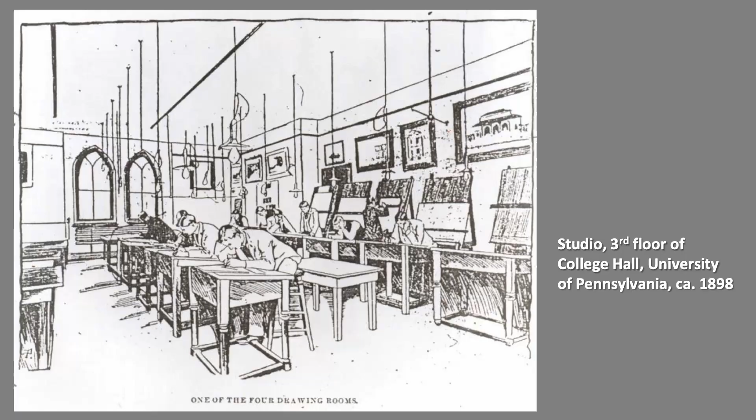Before going into talking more closely about the objects related to Kahn and Komendant, I want to talk a little bit about what I do. I mentioned the idea of architectural imagination and my collection being part of a school of design - the idea that you bring drawings and models as examples into architectural education, that you bring it literally into the building and hang it on the walls of the school. This is something you can learn from.

It's probably a natural and very direct way for one architect to learn from another one. Of course, visiting the buildings and landscapes are also quite important.

This is the University of Pennsylvania in the 1890s. Here's Penn in about the 1920s when Louis Kahn was a student there. This is in the library, and you see the drawings here. In fact, this drawing and the one in the middle are still part of the collection that I'm responsible for.

It's really exciting to see, while our collection was founded in 1978 as the Architectural Archives, we have collections that go back maybe more than 100 years. Of course, this follows the tradition of the École des Beaux-Arts in Paris, among others. So there's lots to learn by looking closely at drawings.

Of course, everybody does things digitally now. When I talk to students, it's always quite exciting for them to see an original drawing - the questions of scale, the questions of technique, how you try different techniques as you're trying to solve complicated problems, how you change the way you're drawing to learn new things, to approach the problem in a different way.

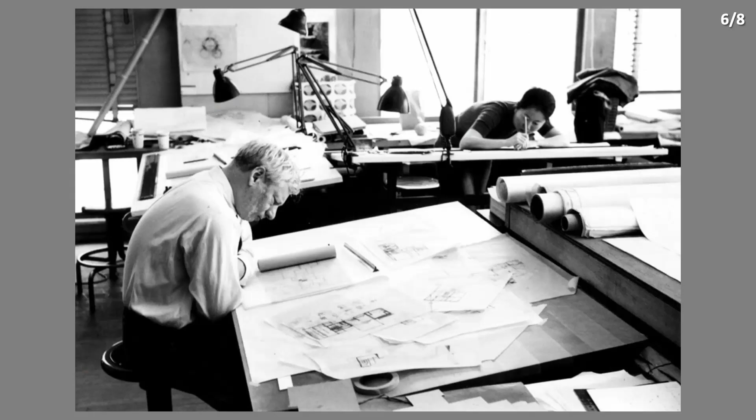We see him working on his own at his desk, a collection of drawings, different things spread out. He's pausing, thinking, scratching his head, what next? That gets me really excited when you see an architect or landscape architect pausing and thinking about where to go next. So he's going to sit and think, he's waiting, maybe considering. That gives us pause too.

We can see other figures, other things in the office: the objects on the wall, the other desks, the arrangement of desks, the rolls of drawings. We see Marie Quo, one of his collaborators, in the office. His office had about 12 or 14 people besides Marie. This is right as he's starting work on the Salk Institute, which I'll talk about in a few moments.

So he knows he's got another idea. You see the charcoal or pencil to paper, the stepping back and pausing.

And then in the classroom, these are all places of learning, discovery, places that were useful to Kahn or essential to Kahn in his creative thought. While we're focusing on him just in this little conversation, it's actually much more expansive than that.

To address Kahn and Komendant as a collaboration is to talk more about this network of people that includes clients and the staff that worked for Kahn. It becomes interesting when you spend 25 years working with a collection - you understand there are decisions, there are preferences being expressed when Kahn brings certain staff to work on a project. Often those staff were his students - an environment of teaching at the University of Pennsylvania, where Kahn taught from 1957 to 74 when he died.

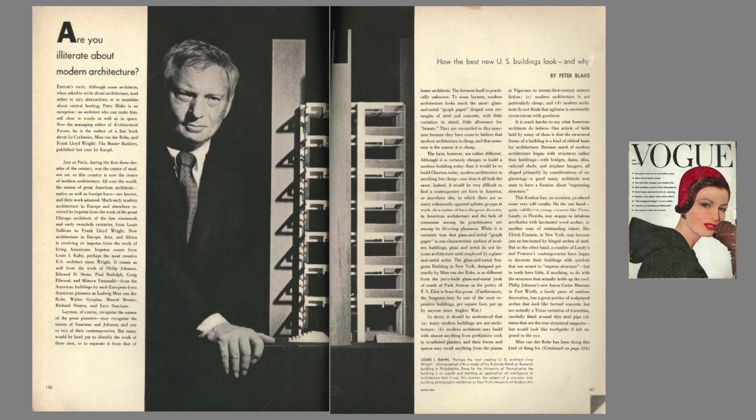We can see the completion of Richards in 1961 was followed up by an exhibition at the Museum of Modern Art in New York in 1962, just 6 months after the building was completed. This was a groundbreaking building that signaled a new departure in architecture. Something new was happening, and it was emanating out of Philadelphia.

It was happening other places too, and this is rethinking modernism - questioning certain of the canons of modernism, or the dogma or orthodoxy of modernism, whatever you like to call it, but making it more open to history, to individual experience, to other systems of thought and value. Ecological systems are very much on our mind today. You see that opening up in Philadelphia, amongst other things.

Sorry. And so, that's part of the background.

Within Kahn's own thinking, he was making a journey from an education as a Beaux-Arts trained architect, thinking about the classical world, but recognizing that classical architecture and the great Beaux-Arts tradition is a forward-looking, modern, problem-solving tradition. There was an evolutionary process going on in architecture that said you didn't have to leave the past behind, but you needed it to be more responsive to the contemporary world. His great teacher, Paul Cret, is part of that evolution.

But a key idea is what Kahn talked about of servant and served, right? That there are areas of a building where people are gathering to do things, working, living, learning, etc., and that there are places that support that, right? And this is hierarchy. This is places that support the work of the central character of the building.

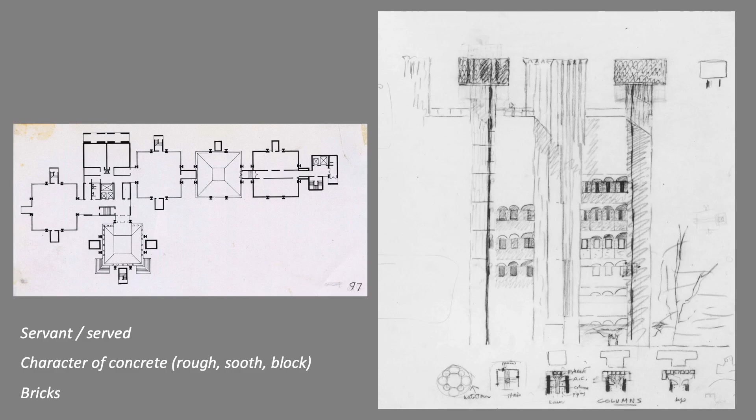The model upstairs, which we've lent for this exhibit, correlates to this scheme. And you can see how in the corners, there's dramatically cantilevered corners that open up the laboratory to natural light, right? Beautiful idea. It didn't really work to the satisfaction of the scientists, but I really don't have time to go into the full experience of the building tonight.

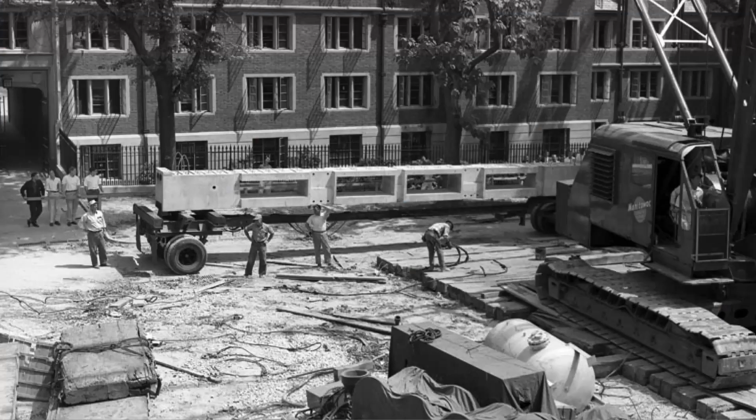So we have a wonderful set of photographs, and part of what I want to do is just slow us down and have us look at the photographs. I'm going to tell you what we're seeing, but as part of the joy of spending so much time with these materials is to start to understand that you can tell stories and that you can reveal what's on people's minds as you go through.

So this is the beginning of the construction using this precast concrete system that is part of the important innovation of August Komendant, right? You can see a large primary structural element that's been fabricated in New Jersey. It's been driven to Philadelphia. Actually, this piece came on a train and then was loaded onto a trailer and then brought onto site. It's a very tight site, very difficult site to approach and to work in.

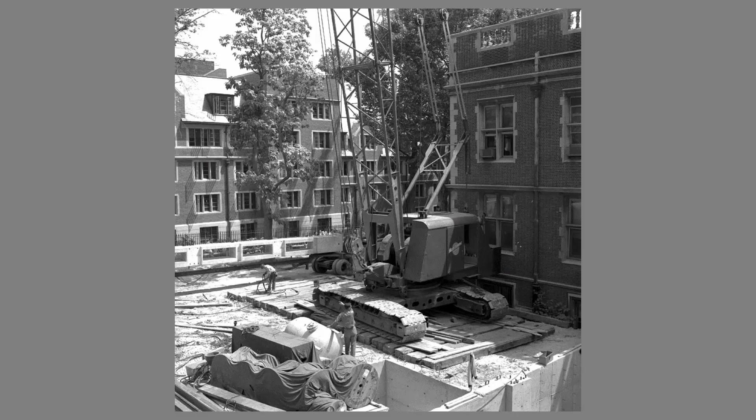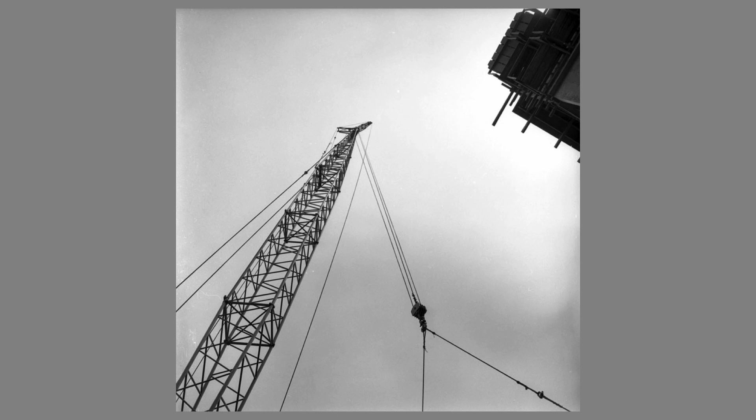And we can see the crane here. So we can see the presence of the crane and just how tightly constricted that space is, right? But the presence of the crane becomes a really important and inspiring part of this process that becomes an inspiration for Kahn. And we see the lifting of that beginning.

This is a favorite photograph, which I've cropped in a little bit, and you just see that 50, 60 ton concrete element. You can see the holes here that are part of the post-tensioning system that Komendant is really critically important in his legacy. But I want to point out the people that are standing at the periphery, right?

I mentioned the exhibition at the Museum of Modern Art. You guys also have to understand that literally people were gathering on the construction site to watch this building being built. So there was this anticipation of something new occurring. And there's evidence of it there. And we know that there were architects that traveled from all over the place to actually see this building under construction. Norman Foster and Richard Rogers among them, right?

And they took back to their work the experience of seeing this building being put together. The idea that how a building is made is a critical part of how one experiences the building. And that idea of building character, communicating the purpose of the building through the way the details come together, how the materials come together, this is really important in that regard.

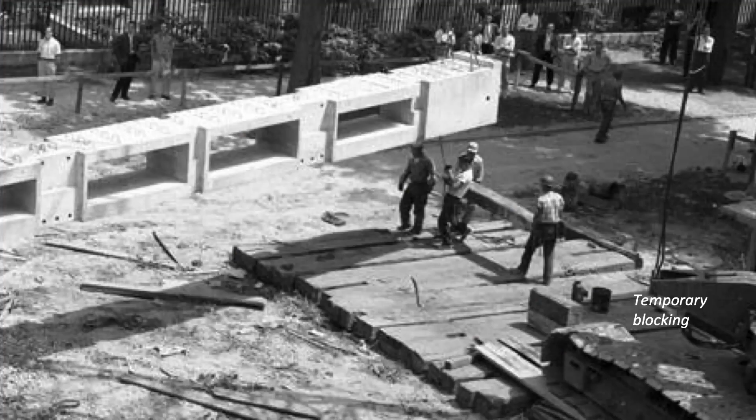I want to point out here are the two men lifting these big timbers up, and they're going to place the blocking because they're actually going to put this piece down. We're jumping ahead a little bit. We see them hoisting this first piece into place. It's actually the second piece, because when I go backwards you can see they dropped that first piece, then the second piece came up and they lifted that one into place. So we're reconstructing some of the sequence. It's like a ballet - there's choreography going on, it's not just Kahn and Komendant.

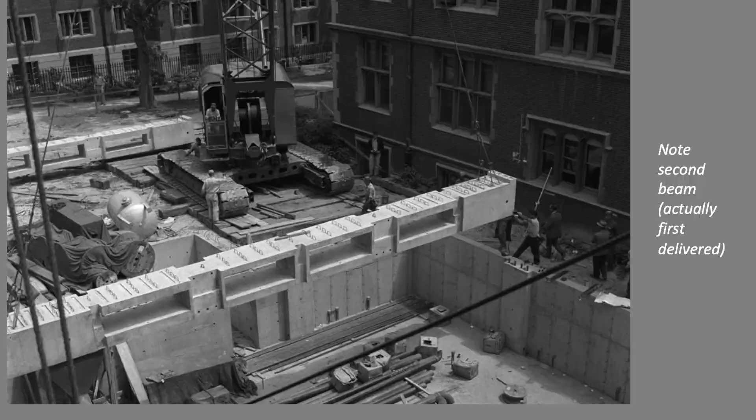You're starting to involve Atlantic Prestress Concrete Company, the builders J.S. Cornell and Company, but then also the collaborating structural engineers, Keast & Hood, who were the ones actually on site every day making sure the work was done with precision.

Here's that first piece dropping into place. You have the men holding the guide wires to pull the thing into place. You see some onlookers at the side, and there's more people gathered at the top there. This is a drama unfolding.

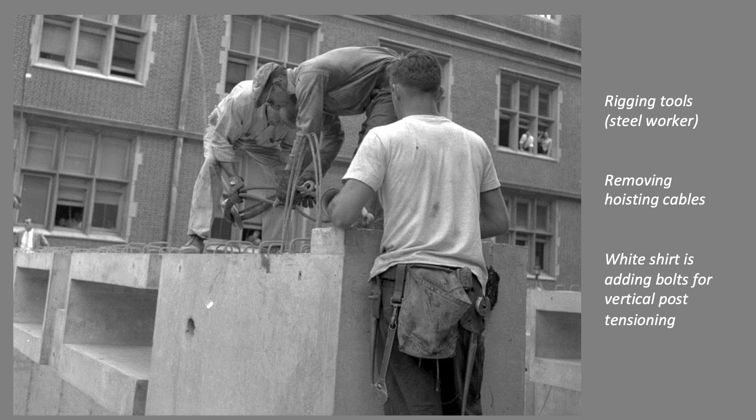Here they've put the first piece down. If you look at that tool, that's the tool of someone used to working with steel rather than concrete. Tom Leslie's book about Louis Kahn, Building Art, Building Science, is really great - one of the things he notes is J.S. Cornell was used to building steel buildings. They were not yet really familiar with this technology - that's how cutting edge it is. So you have steel workers trying to figure out how to deal with concrete, and they didn't necessarily have all the proper tools on site when they did this. It's interesting to find that narrative within these photos.

And the guys on the top are just removing the hoisting cables.

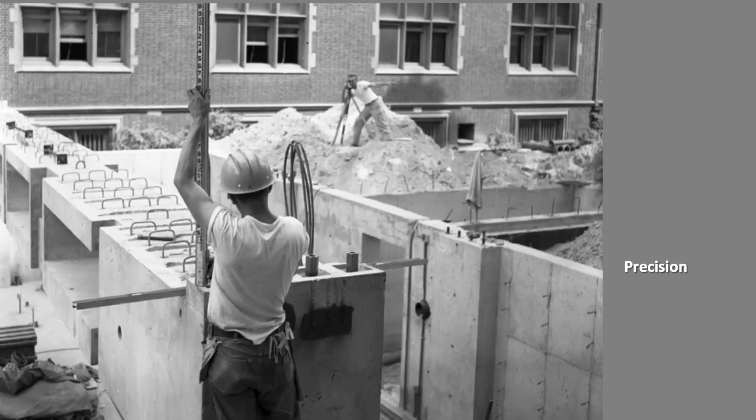I like this photo very much too. You see the surveyor making sure the levels are correct, and here he's holding the level - did they put this at the right level? In the end, the building is built to within a 1/16 of an inch tolerance. That's that much, right? So this level of precision is actually really quite remarkable.

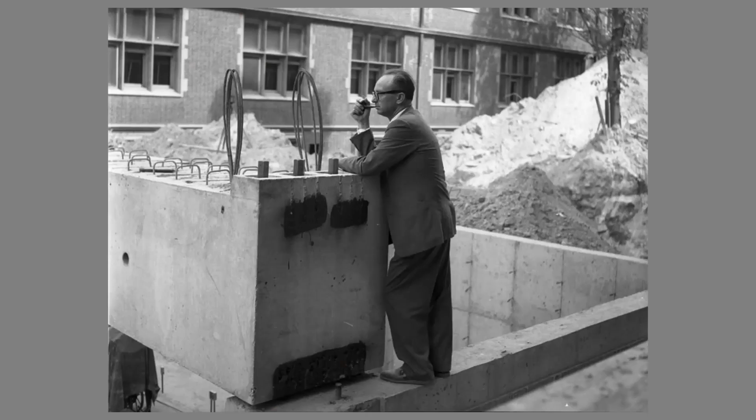And here's your first photograph of Komendant on the site. He's actually come to the site and he's part of this first group of assembly. This actually took about 5-6 months to assemble the 3 towers. I'll show you in a moment, you'll get a better sense of it.

There's actually 3 different kinds of concrete seen. This one is precast, so it has a very, very fine, smooth precise finish - all the dimensions are very exacting. I'll show you a few deviations in a moment. There's also cast-in-place concrete, rough concrete - you'll see a service tower where the rough board form is different. And then there were walls built within those structures of concrete block, yet a third version of concrete. Each different form of material tells you a different thing - it relates a different purpose, a different idea.

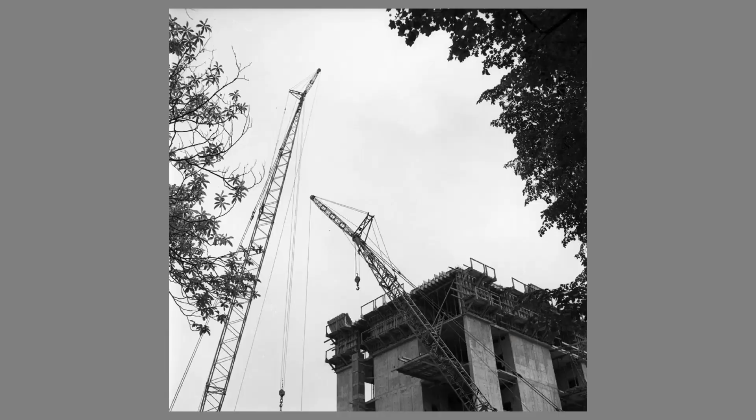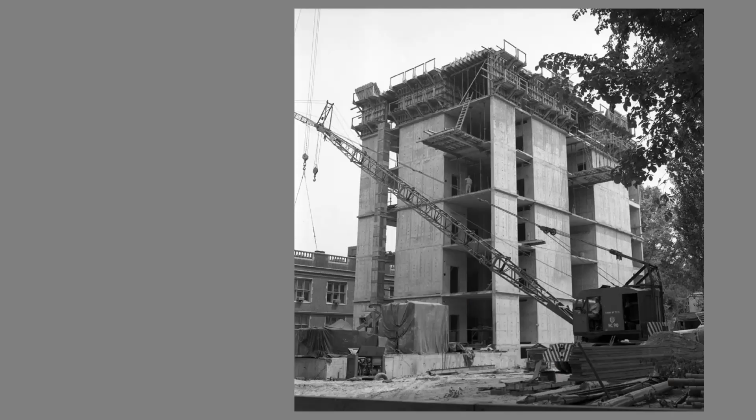There's actually two cranes on site, meant to be working in concert, so as one is building they can be lifting up and preparing the next one. You see that second crane along with the cast-in-place service tower. So there were 3 laboratory towers - precast, post-tensioned - and then the service tower cast in place. You can see the formwork, traditional, extending up. So it serves a different functional purpose from the laboratories, and there are different requirements at play.

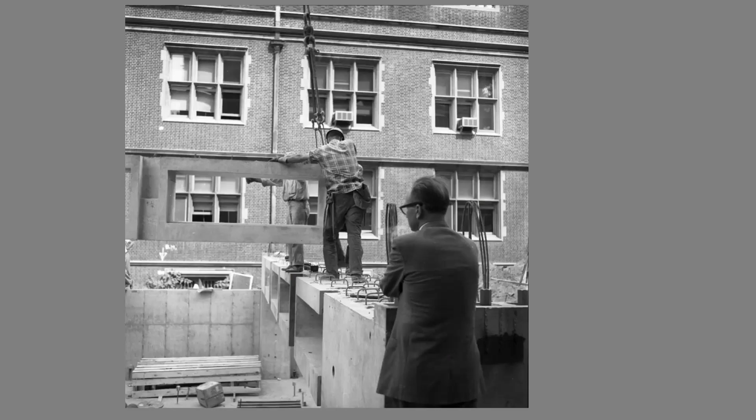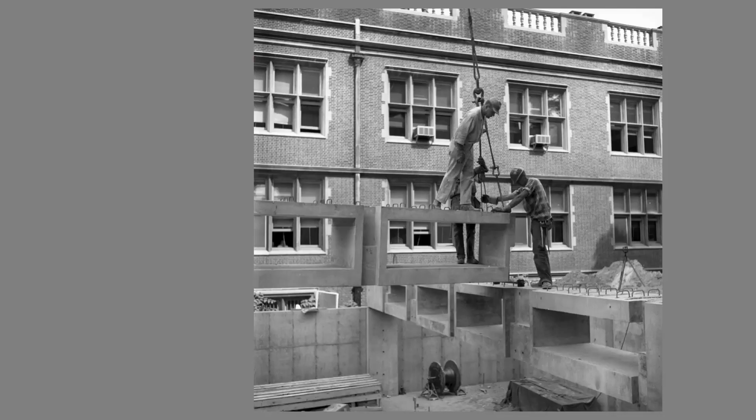So here we are back to Komendant, and they're making the first connection between 2 of the precast pieces. The main one's in place - this is part of the tensioning system. They had to put these bolts on, which are connector bolts, and they're lowering in the next piece. He's smoking his pipe, so obviously the tension is rising.

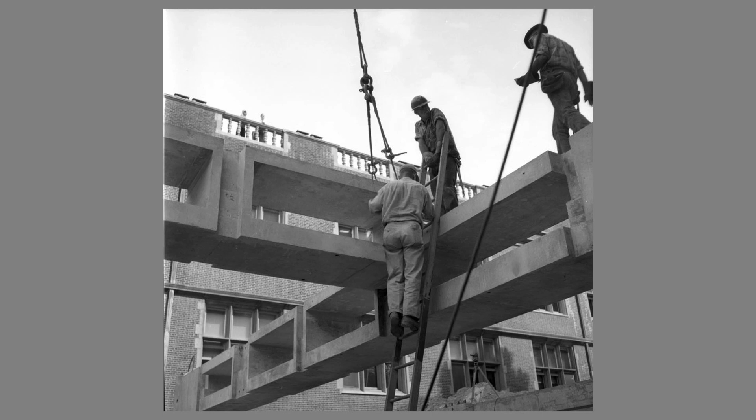We also see the surveyor is still there. They're pushing it down, making sure it fits. Not quite settled, but you're getting the alignment here - you're getting a sense of how tight the constraints of this assembly are.

But still there's onlookers. Those men over there, because they're within the construction area, are probably part of the engineers or part of the contractors making sure how all of this goes together. And then finally it's in place - but you can see they've got some wood there to pry things up.

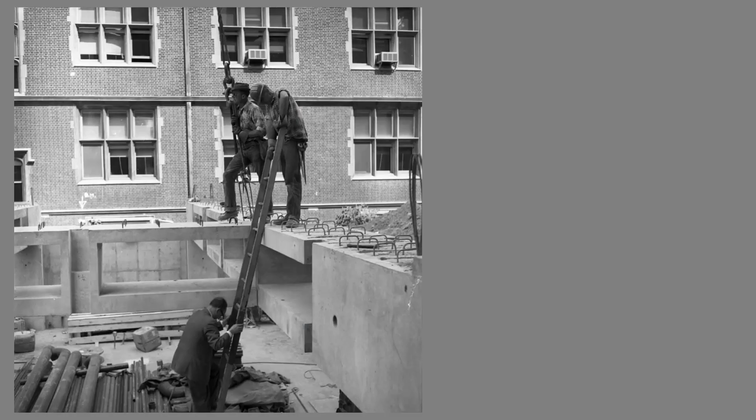I also like this photograph very much. This is Komendant walking down into the basement area to be able to look up. I like this detail - you see the metal worker, he's really holding that ladder.

Is it out of knowledge that Komendant is a critical part? Do they know who this man is? Are they aware of the critical role that he's played in this? It's interesting, I don't know, but this photograph suggests either just good work ethic on the job site, care about other people on the job site, or a knowledge that this is a special person.

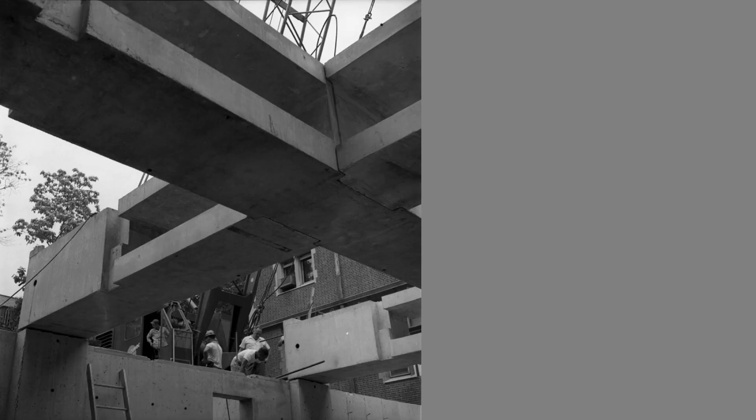And then the view from below of these pieces brought together in two different locations. This is a little bit later in the process, and you can see the men are starting to be grouped to do the post-tensioning. We'll see that in a moment.

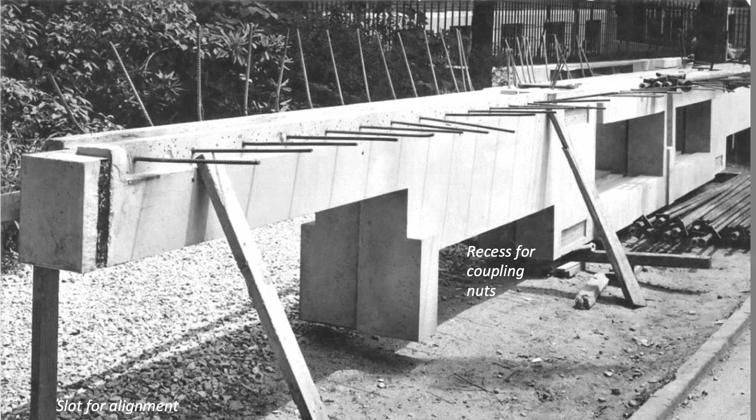These are the end beams. You can see that there's lots of little details like that, which are creating little pockets that allow for bolts and the mechanism of assembly, the tensioning systems, to give their space. This allows for alignment, some slots for alignment, lifting it into place.

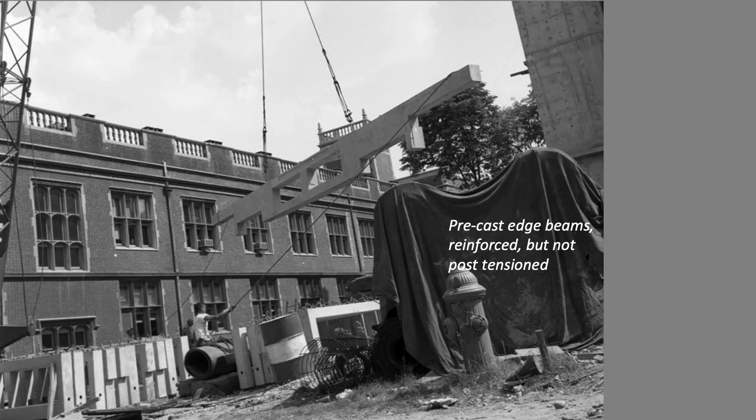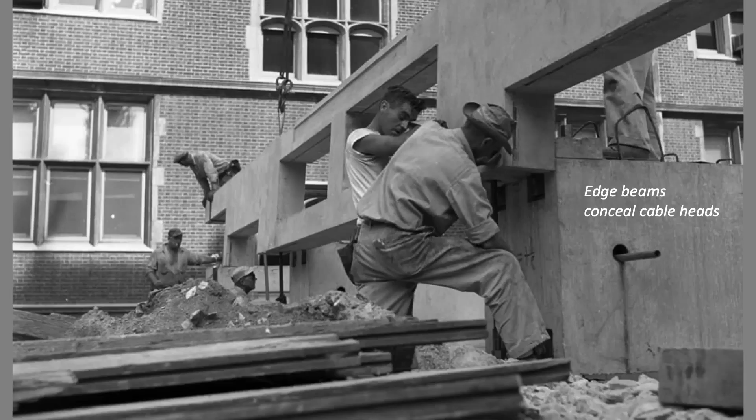Beginning to drop it into place. And you can see how these edge beams, which are precast - but there's actually no pre-stressing in these. They're covering the post-tensioned areas so that these areas are where the post-tensioning has happened. We'll see that in a moment. But just bringing that element down into repose.

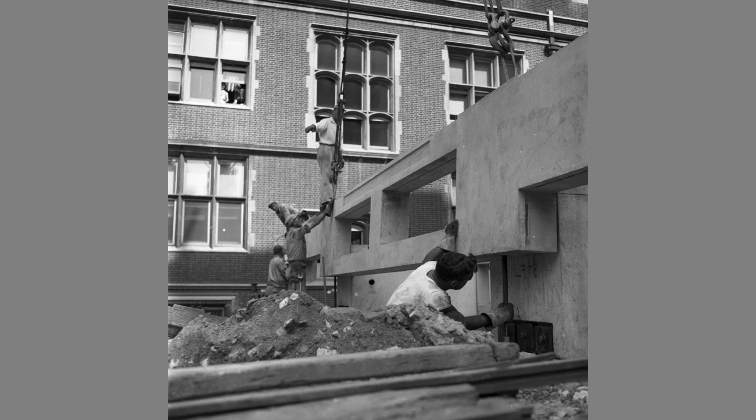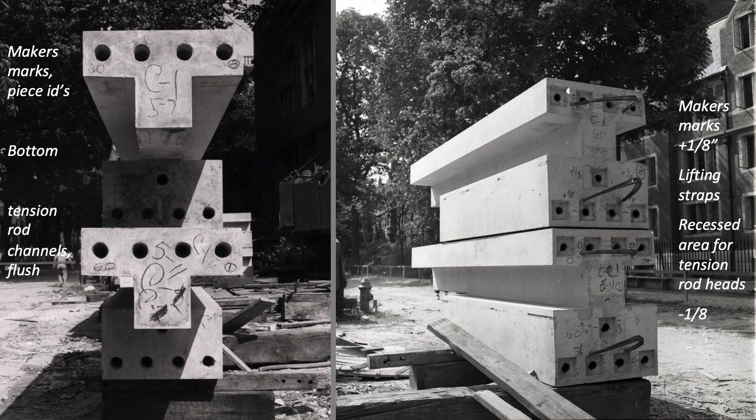These are some of the vertical elements, and you start to see the technical thoroughness. You've got negative 1/8 of an inch, positive 1/8 of an inch. So they very carefully measured all these, so they know the subtle deviations. They've indicated it on the concrete piece. And so when they're actually installing it, it's allowing the riggers, the people doing the installation, to make little adjustments, right?

And you can see the holes there are recessed because you're adding a plate that then the coupling bolt is added to. But on the bottom, you have none - that's not necessary because the rod is running straight through. We can see those vertical.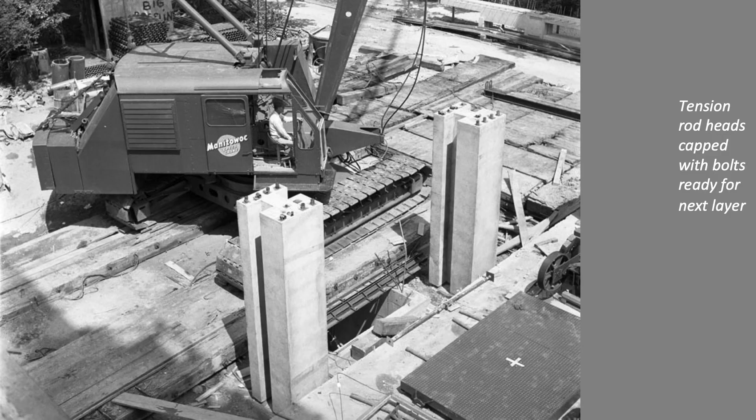The first floor has been laid and they're doing the second level. And here's the actual post-tensioning work being started. I'm sorry this photo's a little grainy, but I think it's helpful to see. You could see the hydraulic jacks. They're getting ready for this because then there's a second photograph.

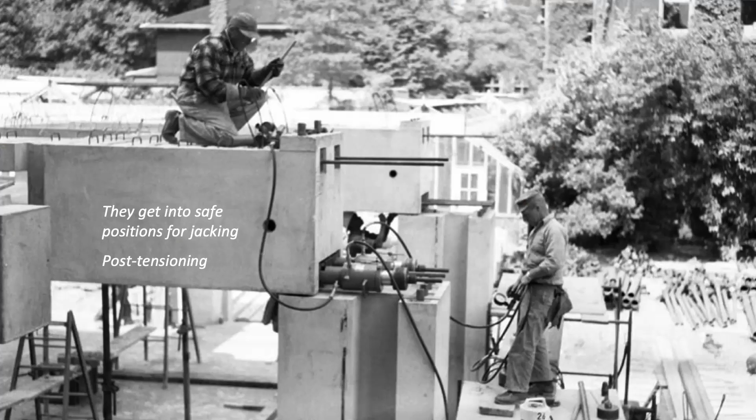You see there's a lot of stress there and the men are out of the way, right? So they've put themselves in places of safety. You can see the gauges where they see the pressure being exerted, and that's what's actually introducing the tensioning, and then the engineers would come to verify that that's correct.

We see the floor completed before they've cast the floor slab. There's the floor slab cast in place, so you can see it's gotten dark. And so here you see it a little bit later.

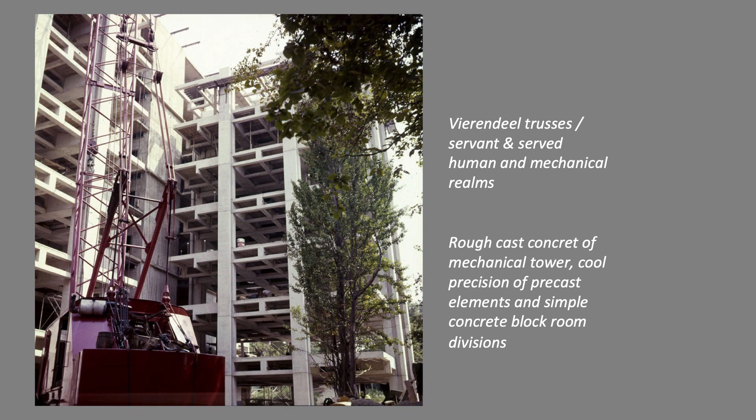So you get a good view of the Vierendeel trusses. So the precast concrete technology that Komendant was very interested in and was innovative here also provided clear spaces for the mechanical systems, for the ductwork. So it created a realm for the mechanical systems of the building, and it put it in dialogue with the place of science where human experience is happening. They have not yet built the towers, but those elements become part of how character is built in this building.

This is my favorite photograph of Richards. It's different from the photographs that Carl put upstairs, but it's interesting to see someone make a different choice than I would. I like this one because it speaks more to the human experience of the building. And while in reality, history tells us it was not the most successful place for science, Kahn is aspiring to the community of scientists and how you are making their achievement and elevating the possibility of achievement in the building - the possibility of how people get together and think more expansively about the world.

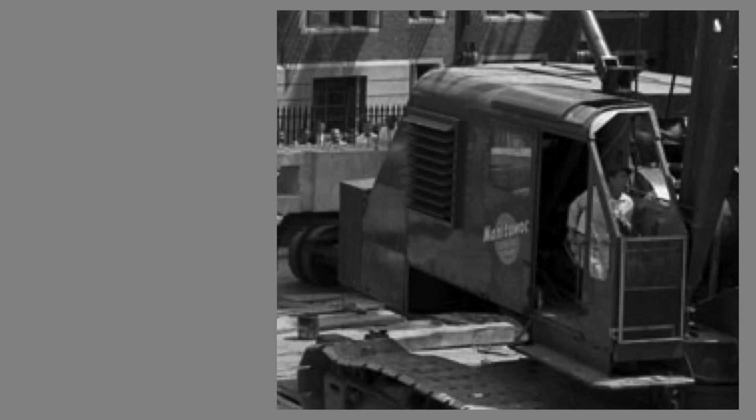So let me talk just briefly about the crane and the hand before going on to the Salk. So I'll just bring you back to this image and just point out the crane. There's a detail of the crane. You can see this logo there.

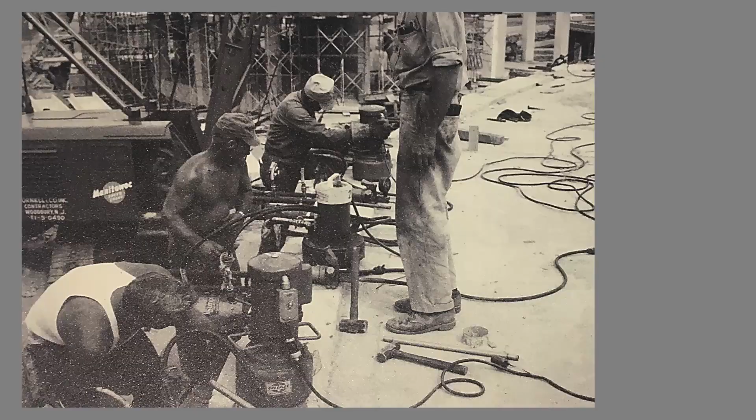Here's another one of the buildings featured in the exhibit, a different Philadelphia architect named Bob Geddes, George Qualls, and others - the Police Administration Building, another important prefabricated building. Moving in, you can see it's the same logo, but going to a different photograph, you can make that clear. And you can see J.S. Cornell - so it's actually literally the same crane at Richards now at this new place, and it's probably the same crew. This is built just shortly thereafter. And there's the two in comparison for you.

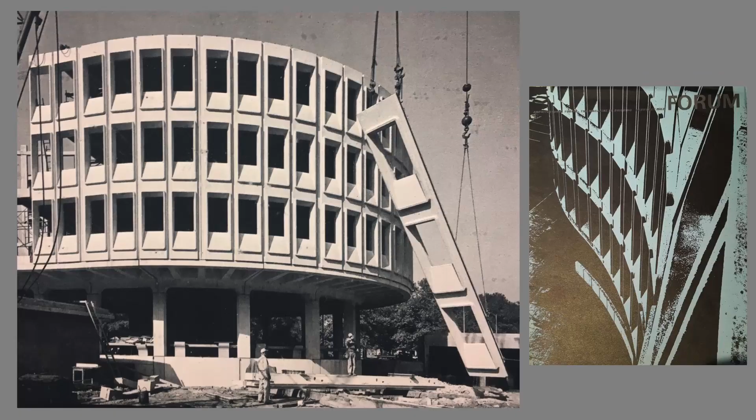And then the roundhouse, as we call it, with its precast system. Ultimately, that made it on the cover of some of the architectural magazines in the United States, Architectural Forum.

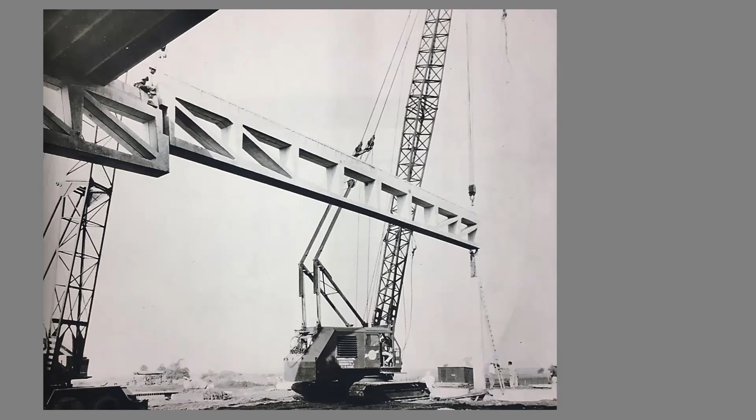Another example of Komendant collaborating with architects and achieving something quite remarkable. Here is a cold storage warehouse in the Meadowlands of New Jersey. This was a really big facility. They made use of the precast technology.

Again, it's the same crane. I'm getting at two aspects here before moving on. Here's the Atlantic Prestressed Concrete team. So Komendant had his own pre-stressed concrete factory in Lakeland, New Jersey for some years. It was not ultimately successful, but he had a lot of collaborations with Atlantic Prestressed.

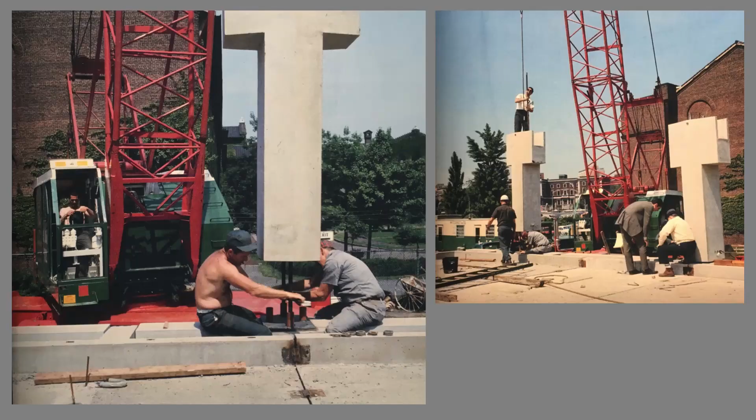Obviously there are other figures that are part of the success of Richards, and these are some of them. Here's Komendant. But I want to come back to these guys. This is yet another building by Mitchell/Giurgola, a parking garage in Philadelphia. It's not the same crane. I was excited that it was, but it's not.

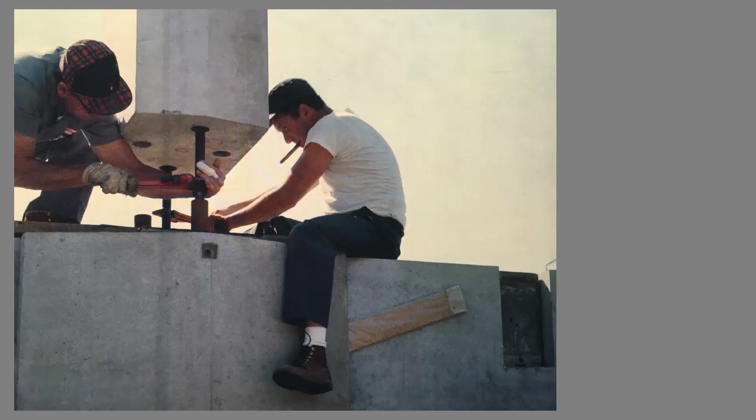I'm also interested in this photograph where you see the grip of the tool, and you see an understanding of the physical aspect of building a building and the knowledge of the hand in making a great work of architecture. So on the one hand, you have the crane as this element that creates new possibilities of architecture and design. On the other, there's still this acknowledgement that the hand is something that's important. And this is part of what makes these buildings great. I wonder if this guy appears in some of the other photographs, but I didn't have enough time to find him.

All right, I'm going to try and finish in 20 minutes. Let me make a point of departure here. We've talked about Kahn and Komendant for a bit. Let me talk about light and a different aspect of character.

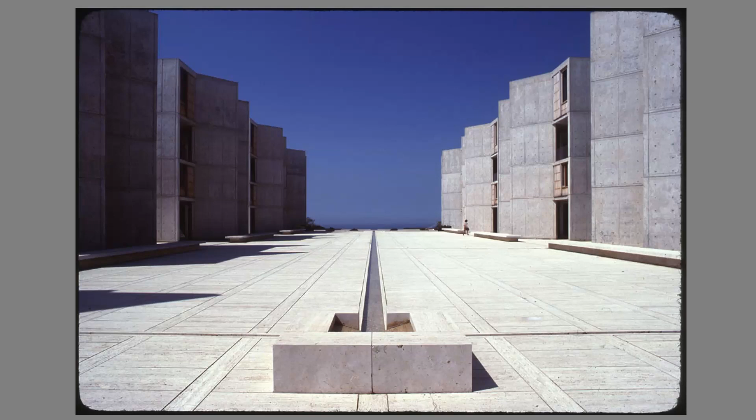We're going to bring this into architecture, into Kahn's work with Komendant at the Salk Institute. This, of course, is a building commissioned by Jonas Salk. It was a place of research — an incredibly successful place of scientific research and inquiry. The scientists who work there recognize that this building gives them something that helps them do their work, something different, better, more powerful and profound than any other experience they had in a laboratory space. What makes that happen is something we should all be interested in.

This courtyard at the center of the building, it's as if the two buildings split and you have just this open space that really has no functional purpose, but it is, in a sense, suggestive of touching and reaching and trying to achieve the sacred. The way that the world moves around this space and light comes into it is quite interesting, but we're seeing it from one vantage point here.

This end of the courtyard. Of course, there's a lot of detail, so the way the pattern of the concrete surface is done, I think, was interesting.

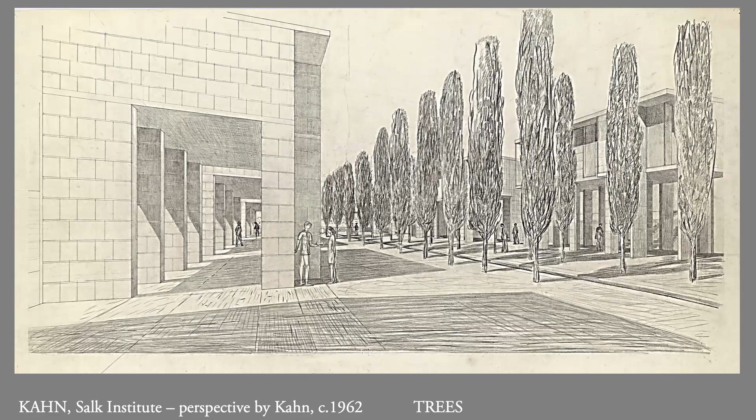But there were two schemes for this. Upstairs you'll see there was an early proposal that went quite a ways into construction drawings, designed by Kahn and Komendant, that were 4 buildings of laboratories with 2 courtyards. At some point Jonas Salk said he didn't like that idea because then one courtyard will fight against the other, there'll be factions. If Jonas Salk is over here, he wants to be over there, and if you're over there, you're a loser, right? Just to put it very simply.

But here you also see that there's a garden courtyard. So there were spaces for the scientists to step away from the laboratory to think and to explore, and I'll talk about that in a moment, related to a garden space.

So here's Komendant's proposal. You can see there's this folded beam that spanned the long way across the laboratory, providing a space where you could put mechanical systems, although it might be very difficult to modify those systems. But clearly the structural system was very present in the experience of the building.

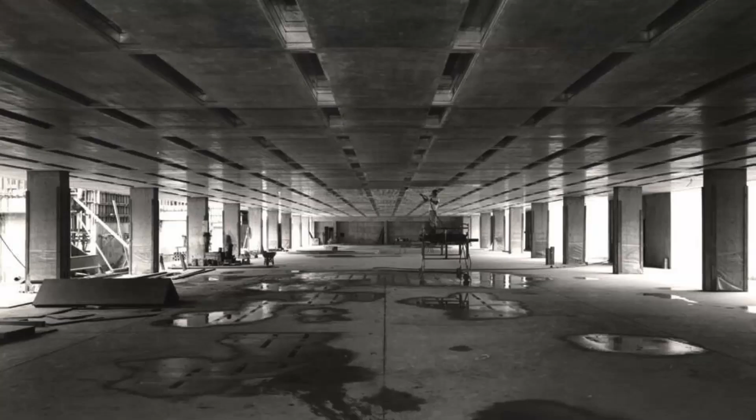But when Jonas Salk gave up on the 4-building, 2-courtyard scheme, they had to make an adjustment, and so it became a smooth slab. So you really don't experience the full power of the structure. The structure does not shape the character of light here — we'll see that in the Kimbell Art Museum.

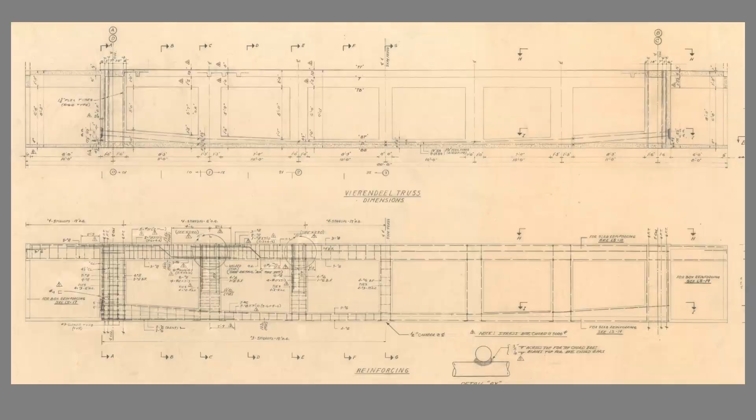But here's one of Komendant's drawings. The original is on view upstairs, of the Vierendeel truss. You can see that open network, essentially square, that allows a lot of flexibility to have the environmental engineers — the heating and air conditioning engineers — have their space to do their work and integrate it into the overall project. But this is not something you see.

This pulls it in a little bit closer. I'm about to show you a couple of drawings by Louis Kahn, and we'll talk about those for a moment, and look at Kahn's way of drawing very carefully. But it gave me pause to reflect on Komendant's way of drawing — just look at the drawing, it's really fascinating.

If you're an architect, and I'm trained as one, you're fascinated that he knows where every piece of reinforcing is supposed to go. I mean, obviously, an engineer is supposed to do that, but using a soft pencil, the way things are assembled so clearly and precisely — I feel there's a certain human presence there. And we'll see that in Kahn's drawings.

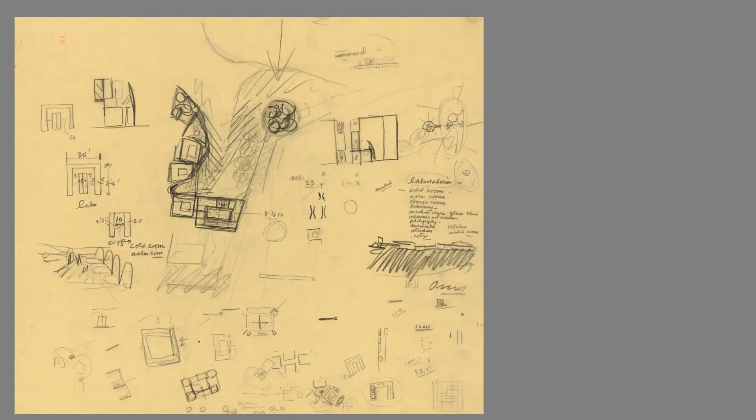So stepping back for a second, we're talking about building character, and we talked about structure's place in that and the material surface's place in that. Let's talk a little bit more.

This is some of Kahn's first drawings for the Salk Institute, and it begins as a site plan. You can see in the middle a clustering of different spaces. I'm going to walk us around the drawing in a moment, but I want to point out first that there are actually 2 drawings.

You can see this here is a type of reproduction, a diazotype print, a blueprint — I don't know what you call it here in Estonia, but it's something you make a reproduction with. But there is an original drawing on that too. So when I talk about following a thinking process, when you have 2 drawings so closely related, with lots of different drawings around it, there's a possibility of reconstructing what was being thought in that moment.

So they're starting with a site plan and asking themselves — and I'm using a plural, I'll get to that in a moment, since there's more than one person involved in making this drawing — how the different pieces and parts come together on a site.

That's the laboratory space. The circular elements, that's kind of a conference center or a meeting house. And then there was housing, okay? So you're asking questions about how to make a site plan, how to bring a site together.

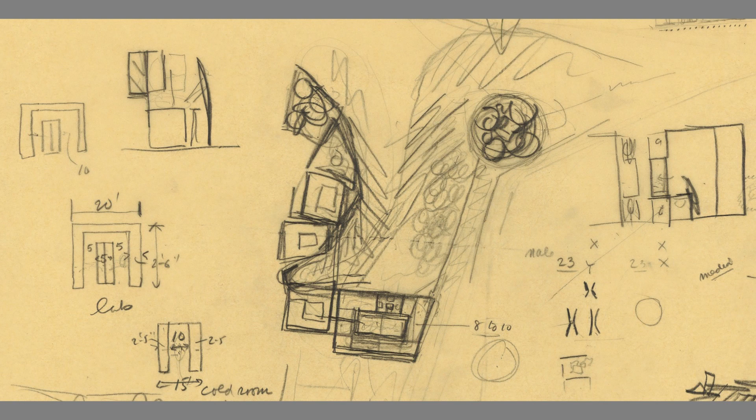Now you see here, labs, you see a figure standing at a table. This is a man or a person doing scientific research. At that side, you see it's a laboratory space, somebody doing work. So part of the conversation of making a site plan is individual experience, and somebody doing their primary work as a scientific researcher, right?

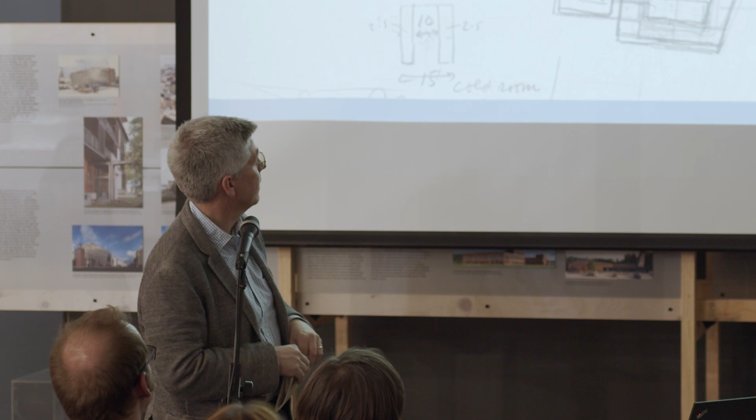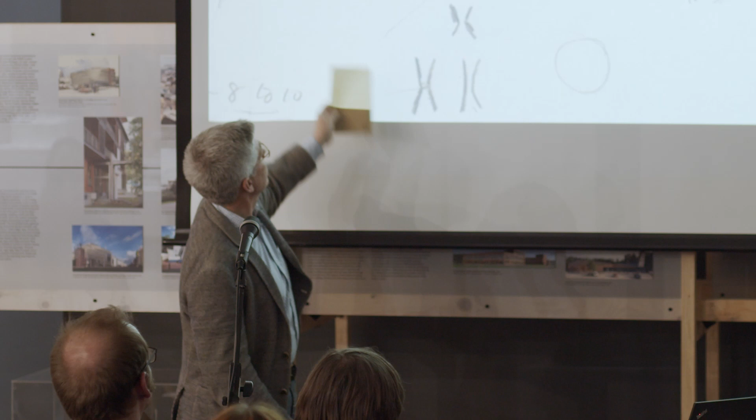So then coming over to this side of the drawing, it took me, it takes time to read this level of detail into a drawing. Here, who recognizes what that is?

X and Y, 23, chromosomes, exactly, right? So Kahn is sitting with somebody who knows something about chromosomes, right? Sounds like there's a scientist nearby, right? But again, we're talking about making a site plan, right? We also, I think, are seeing Kahn's interest in science and the idea that this is stuff that matters in architectural thinking, right? He's putting it on a drawing. I think we should assume it matters, right?

What's in the top corner, right? It's the division of cells, right? I thought for years it was a hexagon and he was thinking of some unusual planning configuration. It's actually the division of cells.

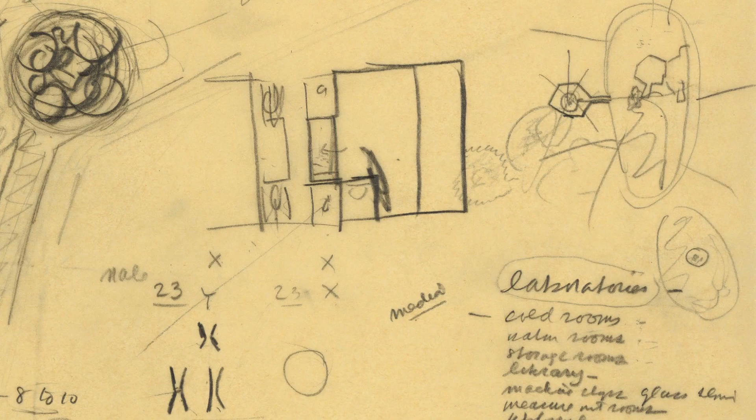And they had put this on film. They had captured the division of cells on movies for the first time. Kahn writes to colleagues in Philadelphia about watching that, right? So that is shown up on the drawing, right? And that funny shape there where it looks like the thing is vibrating, if you've seen a cell divide, there's a moment when it shakes before it splits, right? So I think that's quite poignant that he's putting that on a paper because the 1950s for Louis Kahn is about shifting architecture from smooth space, kind of universal space, into articulated space.

Architecture begins with the making of a room, right? The idea that you split architecture back up into cellular form, obviously you're still thinking as a modern architect, it's poignant that that's there.

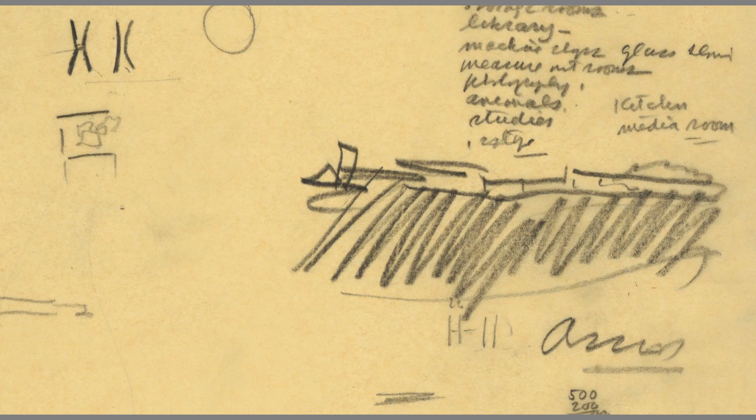You come down on the drawing and there's this strange, what looks like an elevation, and I assumed for years this was just a view of the laboratories from the ocean. The Salk Institute is on an oceanside site with quite a steep cliff. This could be a view of buildings. But you can see there's a tower and a pediment, right? And I'm like, that's not anything Kahn did, right?

It took a while to recognize that's a church. And then to figure out what that says. You guys have any ideas? Northern France? How about Assisi in Italy? Okay, you're close.

And there you get it, you're thinking about a site plan, you're thinking about the experience of an individual doing scientific research. You begin to characterize it as the dedication of monastic experience, of removing oneself from the everyday world and finding a place for dedication, for in-depth pursuit of understanding the natural world in this case. Jonas Salk and Louis Kahn spoke about that garden space being a cloistered garden, right, and alluded to this idea.

Of course, Kahn himself had visited there, and this is a travel sketch he made of Assisi. There's a photograph of it. That's a little bit more distant view of it. And of course, this is how you approach the monastery.

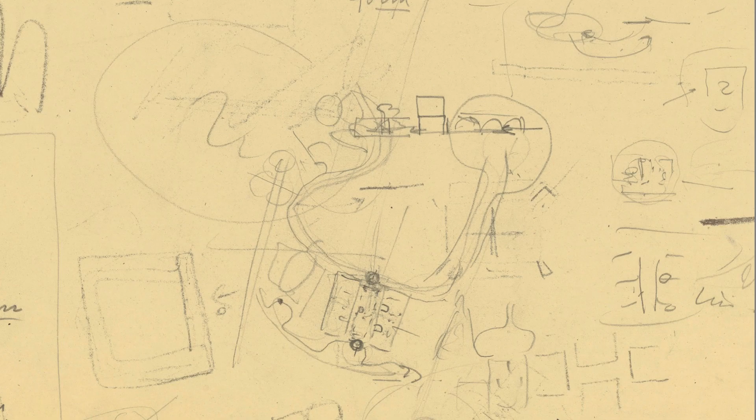But here, then there's a new site plan. You can see there are 2 laboratories, 2 buildings divided from a cloister with a centralized space with buildings all around. It's become a building opened to the east and west. There's only 2 buildings here. They're going to soon go to 4 buildings, and then after a year or so go back to 2 buildings. But we actually see the emergence of that courtyard, right?

And we understand that what's behind it is something more than just a functional aspect, right? So in returning to Kahn and Komendant again, of course structure is more than that. And there you see the meeting house, the housing, and the laboratories.

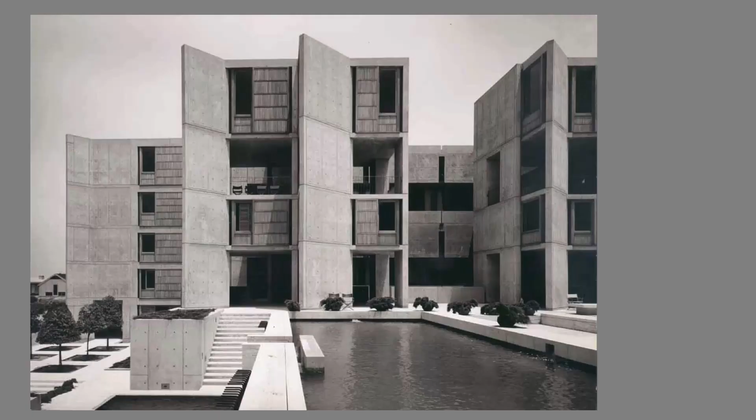Okay, so let's talk about concrete surface. The overt expression of structure, the part that Komendant had an important role in, is not really visible in daily experience, but it makes the flexibility of the laboratories key - it makes the laboratories very, very flexible.

Komendant, I think, understands concrete at a molecular level. He understands the chemical processes going on. He understands the effect of the different materials, how you draw out color qualities, and how if you add certain aggregates you make it lighter weight. He understands all those processes.

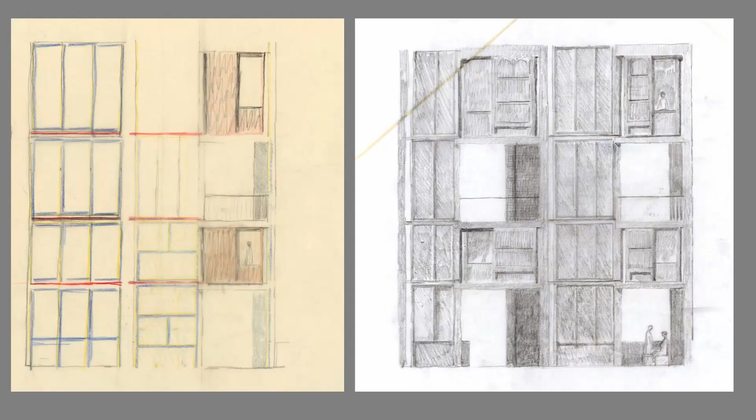That brings a special voice directly into the drafting room with the architect making these decisions. Here are 2 drawings by Kahn later in the design as they're beginning to explore the formwork that makes the surface of the concrete, and how you articulate the process of the making.

In Richards, that's precast concrete assembled on site. At Salk, it's cast in place monolithic concrete.

Yellow lines and blue lines, thinking about how you assemble different pieces of plywood to make the formwork. So this is not board formed, this is using plywood. This is new, right? This is technology that was not so well explored at the time, and the Salk becomes an important touchstone for all concrete that follows.

Kahn is drawing shadow as blue, sunlight as yellow. So these lines, these control lines, are thinking about light and shadow - not as the technical thing of plywood and joinery, but as human experience of shadow and light. And of course the figure being present in the drawing tells us he's thinking again of people and the dimension of human experience. There we pull back to a different position looking into that central courtyard.

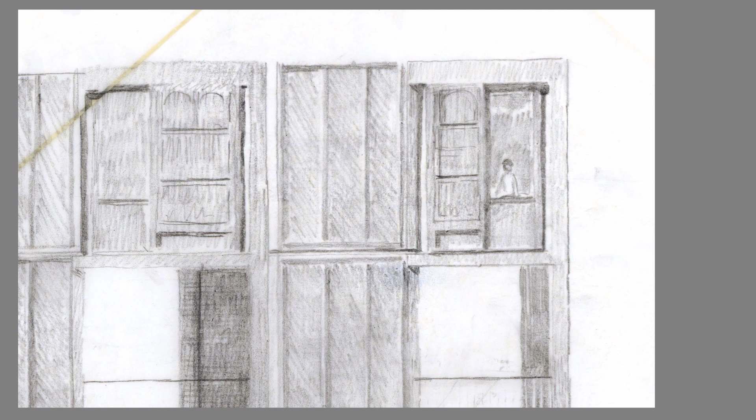Here's that second drawing, exploring a different possibility, here as shade and shadow - not the kind of abstraction of sunlight yellow, shadow blue, this is more of shade and shadow. Again, the figure is still present, thinking about that human experience. He's designing the formwork, but we can see the presence of those infill panels, the shape and dimensions of those details.

So there's a continuity that runs through the building in terms of the surface feature of the concrete, the surface feature of the wood elements, in this case made of teak. This is an integrated experience where all of these decisions are leading into a more complex, more rich, more holistically rendered whole.

And there's a detail - more recently there was a wonderful restoration led by the Getty Conservation Institute that restored the teak.

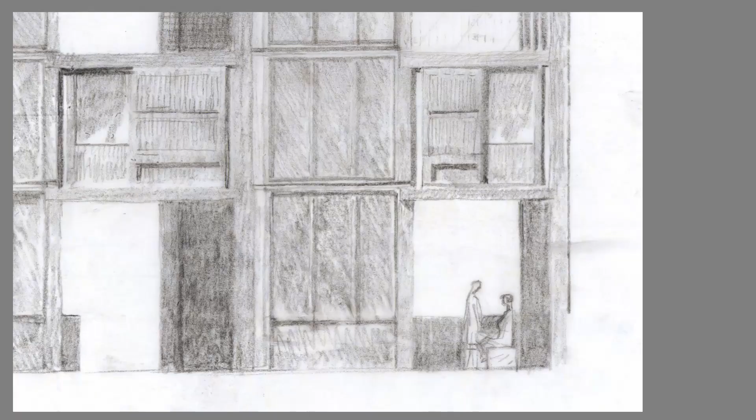And then these figures gathered as part of that experience. This is filed with the technical drawings and not with the preliminary sketches of Kahn, so it was a drawing that was overlooked for many years. Here are those porch spaces that overlook that central courtyard, where there was a possibility again of different human exchanges - the blackboards being an interesting example of how you introduce a detail into the mix.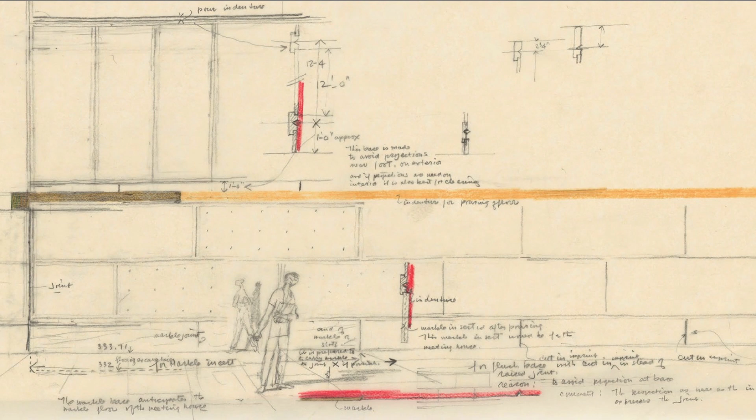You can see he's got figures and he's drawing out. This is concrete. He's thinking about marble inserts, formwork. He's actually making allusions to block printing, wood block printing, and how that creates a surface effect of making. So he wants to reveal and tell the story of how something is made. This is a technical drawing, and he's bothering to draw the figure and the figure's experience, so he has to conjure that in his imagination before he moves forward. That conjuring of a figure in his imagination is not something August Komendant had to do, mind you.

Here, the red is the concrete pour, and you can see how that chamfer is allowing the joint of the concrete place to seep out, and that it allows expressive potential. And a detail.

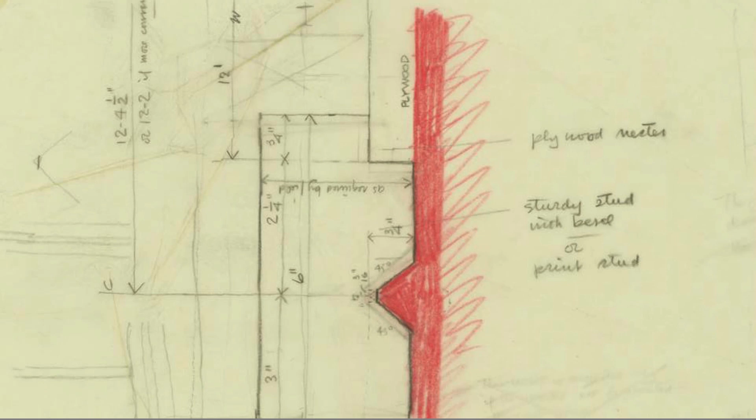Okay, so I'm almost done, I've got about 10 minutes. So I'm using Carl's title from upstairs, The Common Good, to talk about the Kimbell Art Museum.

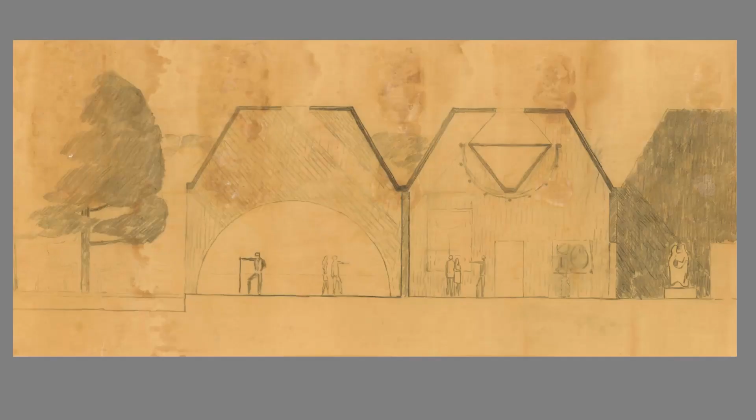The building starts with this folded slab system that recalls some of the effort from the Salk project - these long spans, about 100 to 120 feet depending on the scheme, that would have spanned the full length of the gallery, with elements that sit within providing spaces for mechanical systems, lighting, and other technical aspects. Natural light is a presence within the gallery and helps determine the experience of the gallery. You can also see there's indoor-outdoor spaces within the volume of the building, courtyards essentially, that allow a different light quality to come in.

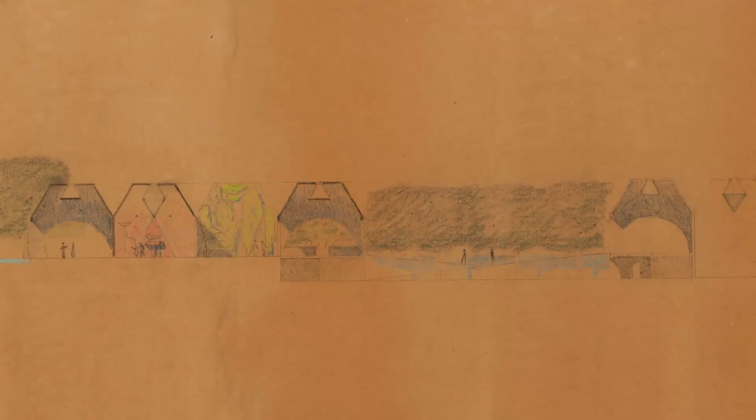This is a beautiful drawing done on, it's a sepia print that's rendered in pastel, and again we see that blue shadow, yellow sunlight idea. This is a presentation drawing, combining garden spaces and structural systems. So Kahn is this figure who is really orchestrating a lot of these different technical expertise coming in from Komendant and others into this overall powerful effect.

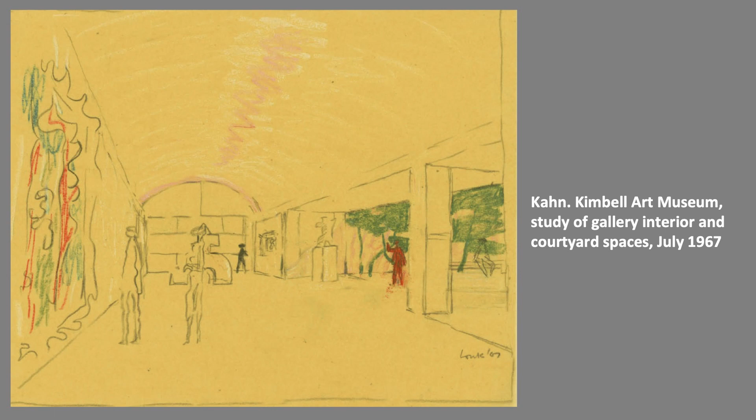Here it's perhaps more in the intensity of the summertime, and we see the trees are fleshed out, filled out, and we can see the light is more intense, rendered on the top with jagged lines of red and pink. That light is somehow being reflected onto the surface of the vault above.

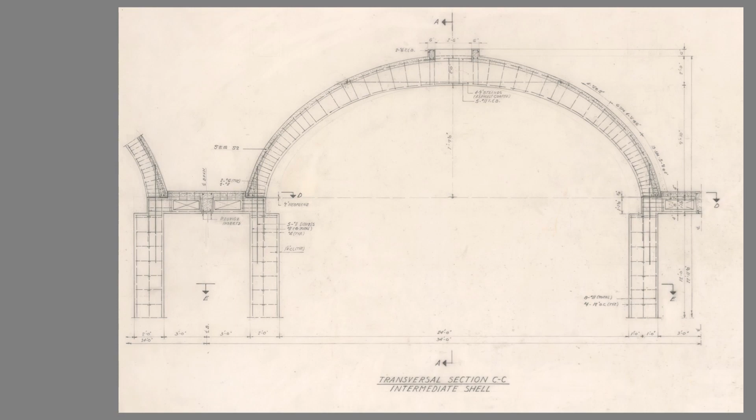So here you can see one of Komendant's technical drawings, on view upstairs. This idea of it being a thin shell, only about 3.5 inches thick. Then there's a beam at the edge that stiffens the thin shell. It's a 100 foot span. Kahn has asked and insisted that you remove the material right at the center of the shell, where the forces are at their highest, and he wants to put light there. So he's really asking the impossible of the structure, but of course Komendant can provide a solution.

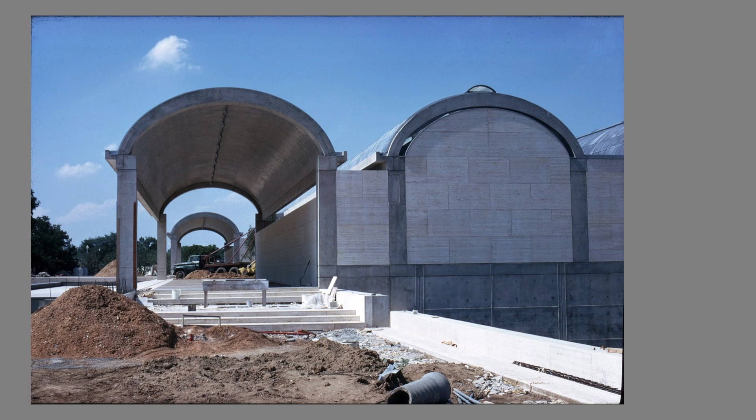Here is the building as its construction is progressing. We can see the combination of these porches, which are not really necessary - they're part of the landscape experience. They're part of shaping and preparing you for the experience of the art, giving you different shadow places, different places to sit to enjoy the fountains, and then we see the galleries. The porches, of course, are not cut in the middle like the others.

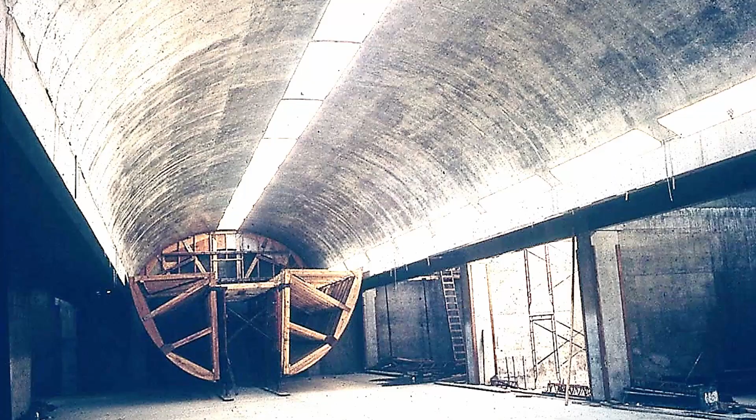Here's a photograph of the construction on the inside where you can see that light slit before a device was inserted within it, and I'll show you that in a moment. You can see the light entering that space and the formwork, which is part of it.

This project really would not have happened if Komendant didn't fully commit to supervising every aspect of its construction, being present as the pours were done to make sure the contractors were technically up to it. So his presence day to day on the site and his understanding of how to operate in that environment is critical to the effect of the building, as much as his command of mathematics, his understanding of and design of the structure.

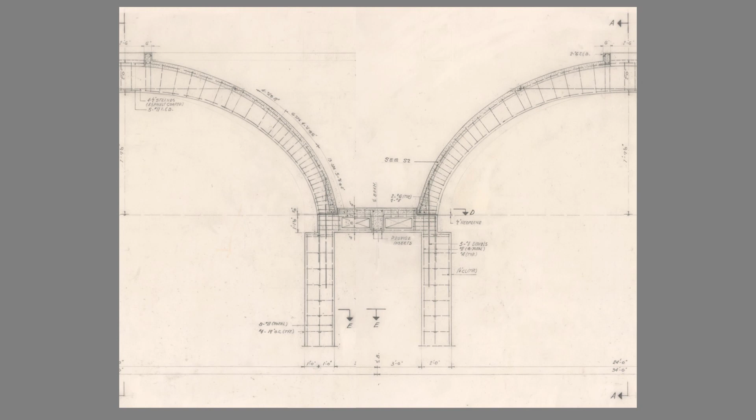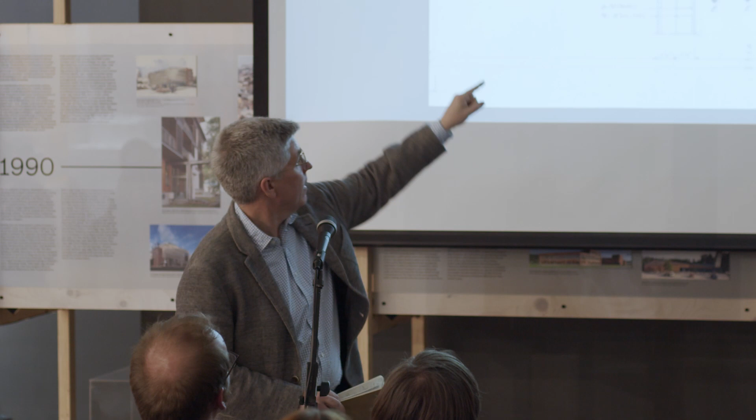But in actuality, as a structure, it functions more as a gull wing. So I've taken the drawing and I've cut it apart and pieced it together. You can see it's really like a curved beam that spans 100 feet, connected to its mate on the other side. It's not a perfect structure, but given all the different forces related to this project, it is the best solution.

And then the experience from that point on the inside - I'll draw your attention to the lunettes at the end of the gallery space. Just having the experience of being in Tallinn for the second time, I was here in 2008 walking around the old city - it's pretty delightful when there's an unusual window. I think people tend to notice when something is different about a window, that it's shaped in an interesting way. Well, those are shaped in a really interesting way, and I think it speaks to Kahn and Komendant's collaboration.

Here is, I think, one of the most important drawings in the exhibition upstairs. When you guys go upstairs, you'll see this - it's a drawing by Kahn. The blue is the glass of the window. You can see the thin shell, there's the edge beam which stiffens the edge of the shell. You can see these horizontal elements - that's travertine infill, so that's not doing structural work. And then you can see the mechanical systems.

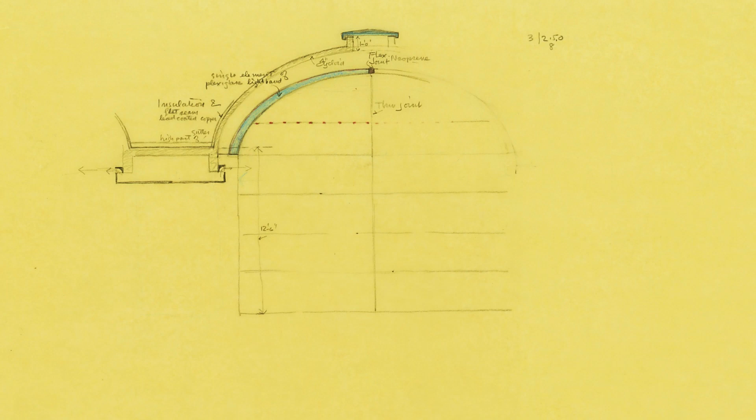You see how the window is bigger at the bottom, and as it goes to the top it gets thinner - that's a recognition of the reality of the engineering. The forces and the requirements are needed most at the top and less at the edges. So you could make the window narrower at the top, fatter at the bottom, or you needed to make the beam narrower at the bottom, fatter at the top. An interesting and unusual window.

There's a detail of it from the inside as it begins to taper, and the view of it from the outside. You can see some of the other details, the juxtaposition of the concrete and its surface character, which has a wonderful warm reddish color rather than a cool greenish color, against the Roman travertine. This was travertine from Tivoli.

And of course, the experience of the art inside—the quality of having natural daylight inside is really important. And the structure is critical to that experience.

I had the experience of working in the Kimbell for a week, overseeing the installation of an exhibition in March. In March in Fort Worth, Texas, the sun sets around 5 o'clock, so it starts to get dark. When I was in the museum towards the end of the day, the light levels really started to come down. It felt like coming home at the end of the day and entering your house—it's dimmer inside, giving a different feeling, a different experience. Being inside an art museum and having this almost domestic character introduced towards the end of the day is really something special, and it's only through the presence of natural light that you get that.

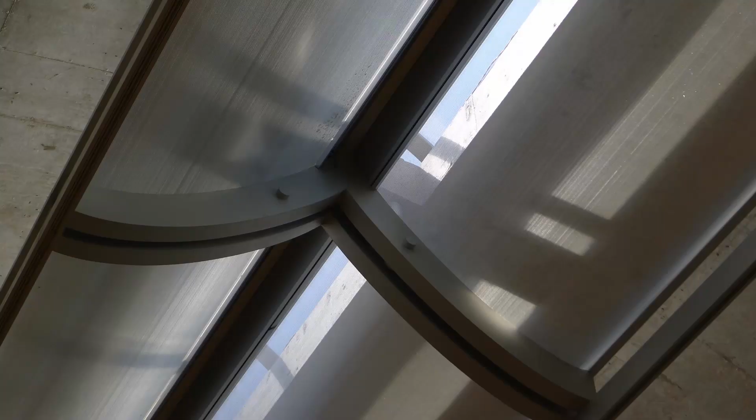Of course, you cannot have direct light hit a work of art, particularly one on paper. So you need systems that allow you to negotiate the conservation requirements of displaying art against the dynamic, changing experience we have as individuals as we approach a work of art and experience it.

I would suggest you all go to the Kimbell Art Museum at some point in your life, and you will have one of the great architecture, landscape, structural experiences possible in 20th century architecture.

That's a photograph I took during those opening days of the connections between inside and outside. The way art reflects our place in the world, our connection to nature—it reflects many things. But having that presence of changing light, of landscape, of a garden—a museum needs a garden—is quite wonderful, and it all comes together in this incredible synthesis of art, architecture, structure, and so on.

So I just want to end with two things. One is to show you two objects that I think are actually quite special, and that are part of the exhibit upstairs. It was only in preparing these objects to be shipped over that I recognized there was a story within them. These are August Komendant's school records from the university at Dresden, where he received his training as a structural engineer.